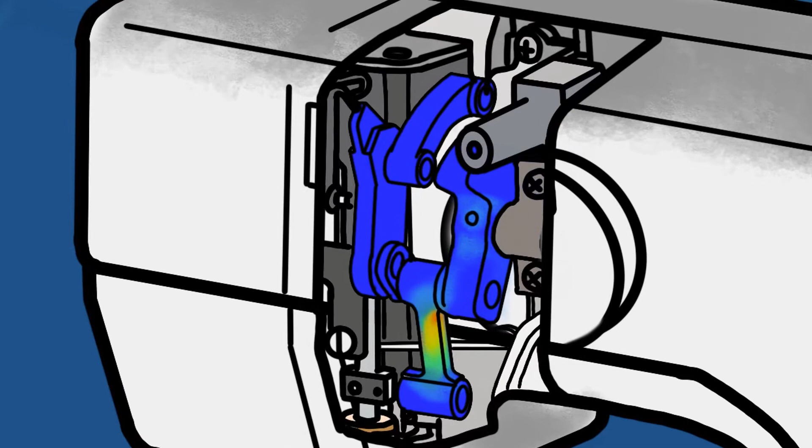Adam has an existing simulation study to validate the crank components of this sewing machine. While a linear static analysis in SOLIDWORKS simulation provides good insight into the structural integrity, Adam needs more capabilities provided by the 3DEXPERIENCE platform to solve for the dynamic response from the inevitable needle break.

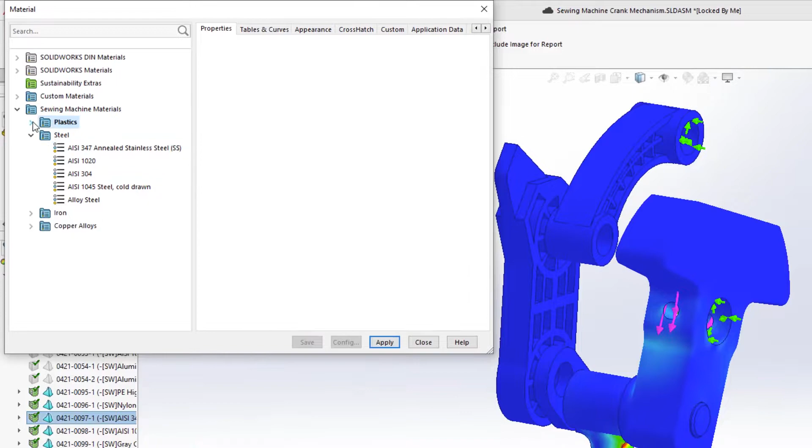Some of the sewing machine components are defined with custom materials, and they need to be created in 3DEXPERIENCE. To automate this task, Adam imports his custom SOLIDWORKS material library. This eliminates the need for the time-consuming and error-prone task of creating materials manually.

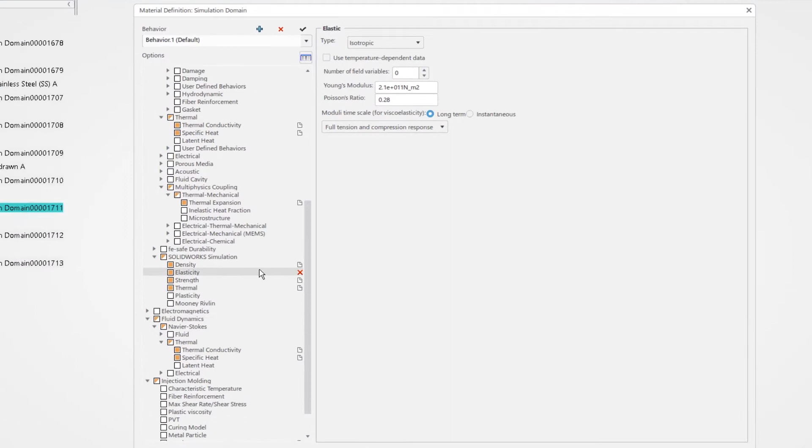In these new material objects, the SOLIDWORKS simulation material properties are maintained and converted to Abaqus multiphysics properties. These are leveraged to solve for additional real-world phenomena. For the case of the needle break, Adam only needs to add damage properties.

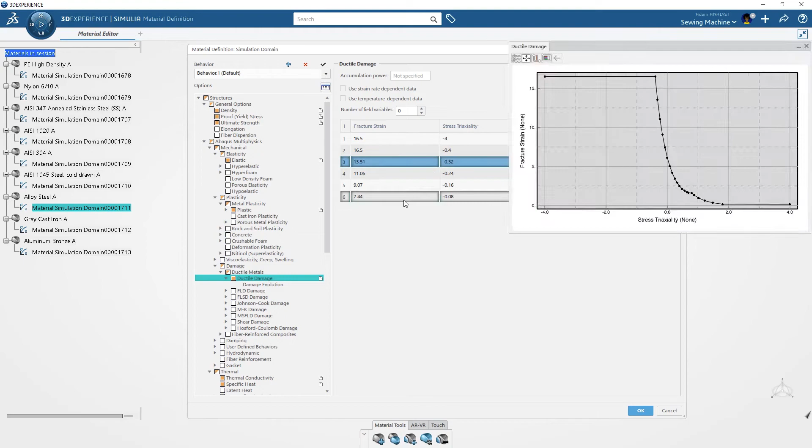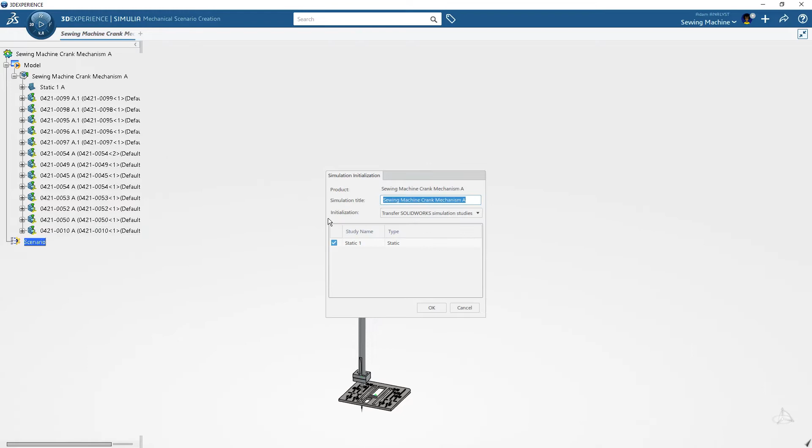Back in SOLIDWORKS, Adam has access to the centralized 3DEXPERIENCE material library, so he can ensure he's defining the correct materials. Additionally, when he transfers the simulation study to the platform, the materials, along with the loads and boundary conditions, are automatically mapped to the newly created structural simulation. With this, Adam can easily extend his simulation workflow.

Adam builds on top of the simulation by adding a new procedure with an explicit dynamic step, so he can solve for the needle break and the response in the sewing machine crank.

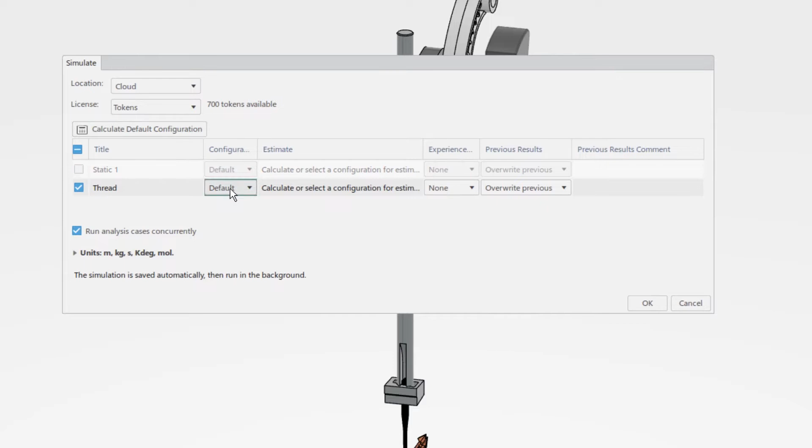To reduce the calculation time and eliminate the need for Adam's computer, he runs the simulation with the included cloud license. The simulation can be monitored from any device with a web browser, so Adam can easily track the convergence and see when the results are available.

While viewing the results, Adam identifies an opportunity to optimize the shape and mass of the needle bar link. He defines the SOLIDWORKS dimensions of interest as parameters and selects them in the new Parametric Design Study in 3DEXPERIENCE.

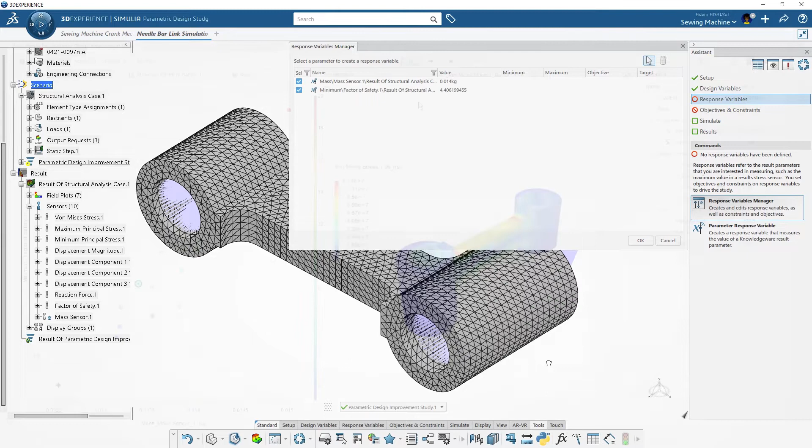With goals of minimizing mass and stress, the best design alternative is identified for him. With a couple clicks, he generates the alternative design so he can perform additional analyses and update the SOLIDWORKS assembly with the optimal part model.

To evaluate how long the link will last, Adam creates a durability analysis case and defines the fatigue loading. The results identify where and when the link will fail first. But how can he increase the life without changing the geometry?

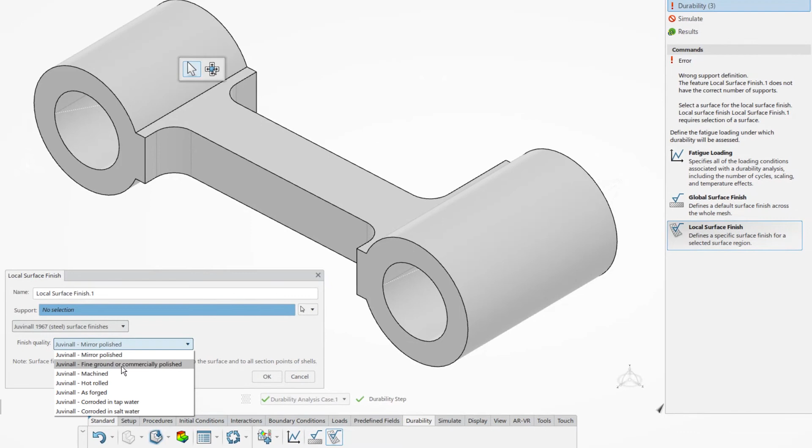He modifies the surface finish in the weak areas only, which minimizes the amount of manufacturing necessary to create a long-lasting part. All of Adam's work is managed and automatically backed up on 3DEXPERIENCE.

Furthermore, he doesn't need to spend time creating reports of his simulations. Since all the data is on the platform, the details can be easily viewed in 3D in a web browser. Comments, notes, and changes can be shared with other stakeholders in the same cloud-based environment, streamlining communication throughout the organization.

And this rapid product development and validation doesn't stop at structural analyses. Take on fluids, plastics, electromagnetics, and motion studies as well.

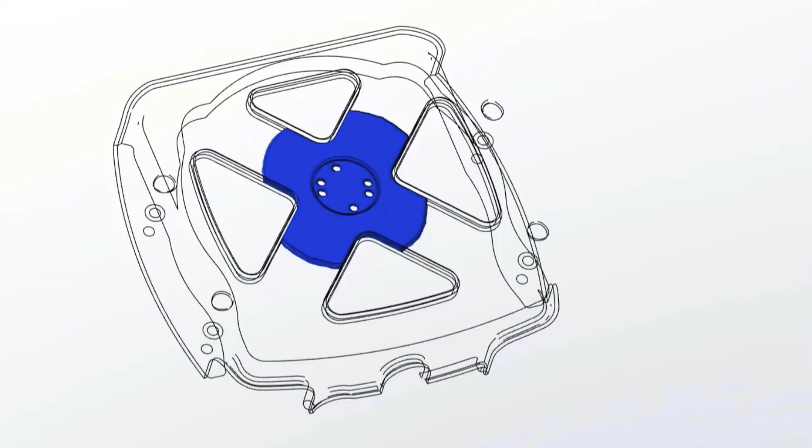How will you expand your horizons with advanced simulation and 3DEXPERIENCE Works?